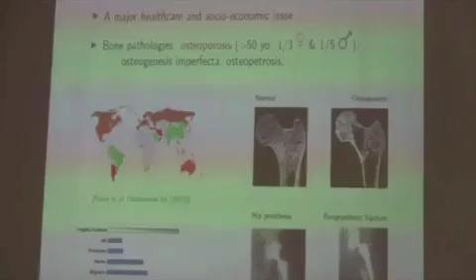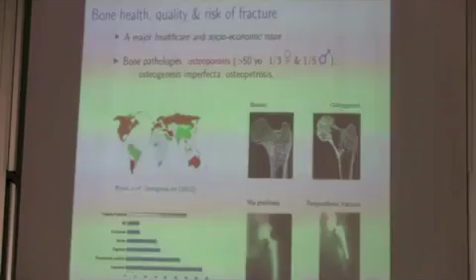It was said, everybody is concerned, and osteoporosis and bone diseases are a very important issue. It is estimated that fragility fractures related to bone diseases are the second most important social problem in healthcare after dementia. And we have already heard about the differences between a normal bone and osteoporotic bone, as well as the fact that osteoporosis, which is a kind of genetic disease, is not the only action which would justify this bone structure, since after a long bed rest, or even for astronauts coming from a microgravity environment for several months, their bones have similar structures to the ones of osteoporotic people.

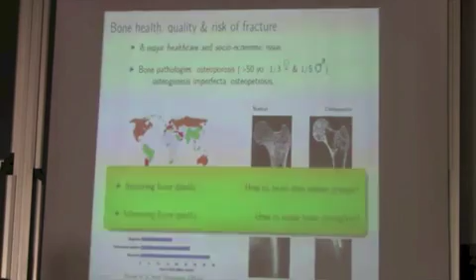Why? Because bone is able to optimize, to adapt itself to its prevailing mechanical, but I will be focused also on biochemical environment. So in my talk there are two main questions which are relevant in bone biomechanics, these two ways, which I try to depict in this picture. Bone remodeling is something which is important at the organ scale for physicians. They want to understand how to improve bone strength.

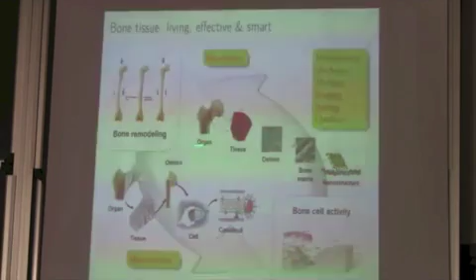But in order to do that, we want to contribute to understand how biomechanical stimuli can be transferred from the organ to the cell scale, where the bone cells, which are the real actors of bone remodeling, can be activated, can act in order to remodel the nanostructure, the microstructure of bone up to the organ scale, where we can observe such a beautiful and very well organized

structure. So these two terms, mechanomics and materiomics, are two very new terms. This was introduced in 2006 in the World Congress of Biomechanics, and this is even younger. And they refer to these two ways, which are of course concerned with each other. But for today, I will be only speaking about the very last part. So bone remodeling at organ scale.

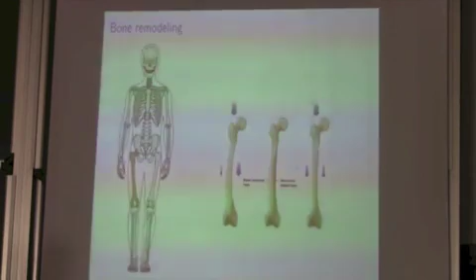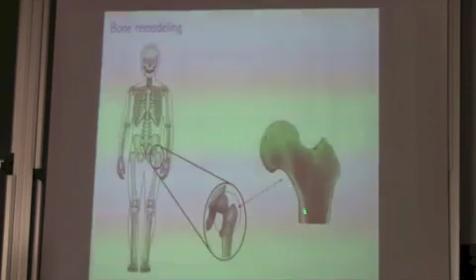At that scale, remodeling can be perceived as a change of shape, but not only that. Actually, if you look inside the organs, we can see that there are several kinds of microstructures. There is a kind of dense outer shell, what is called cortical bone, with a spongy material inside, which is the trabecular bone. And these structures are not always the same according to the anatomic site. For instance, in the sternum or in the femoral head, the microstructure of the trabecular tissue is different.

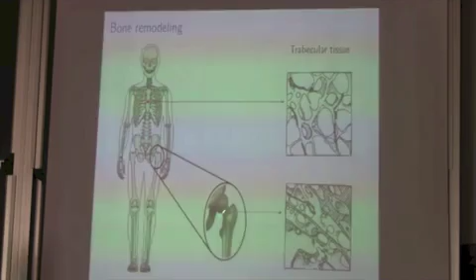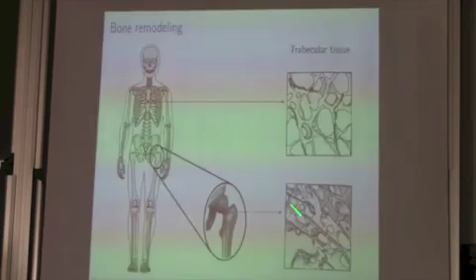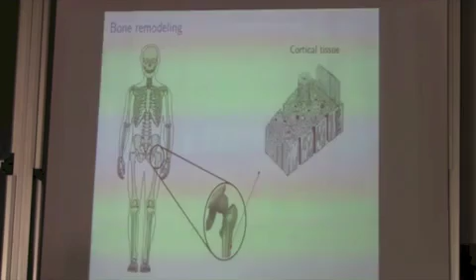So why? Because the mechanical forces that these two bones are supposed to support are not the same. So in there we need less bone matter than in here. Moreover, you can see that in the sternum there is no specific pattern, whereas here there are specific directions, so isotropy versus anisotropy. This is very interesting. Also, the cortical tissue has a very specific microstructure. There are some cylindrical units called osteons, which also have a major role in supporting the mechanical forces applied

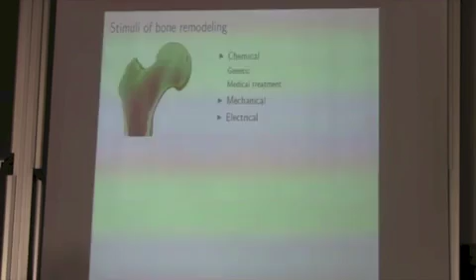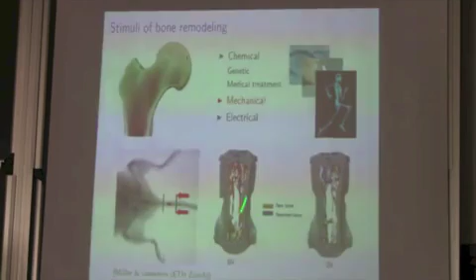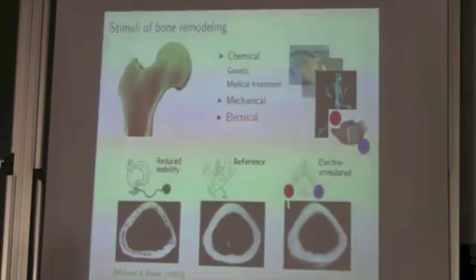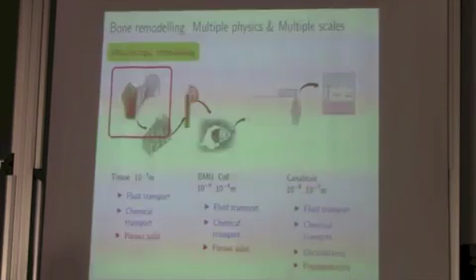That criteria have to account not only for mechanics but also for chemistry, since genetic and medical treatment can affect bone structure. Mechanics, of course. This is a picture of a rat tail when it was subjected to a mechanical force or not, and also electrical stimuli. We know now that electrostimulated bone can increase the bone mass, when this was a turkey, not a human. So the nature of the stimuli driving bone remodeling is manifold. And what we try to do is to develop a model and to understand the nature of the very basic mechanism driving bone remodeling, accounting for all these types of phenomena.

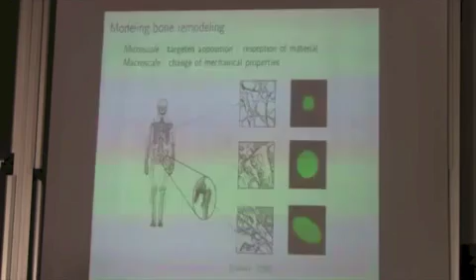So, looking explicitly at the macroscopic scale, I will try to explain how we could explain the different bone microstructures that we can observe. In this case, look at these green spots, since they will play more or less the central role in my talk. The green spots hint at the elastic ellipsoid. So, more or less, this is a small green spot.

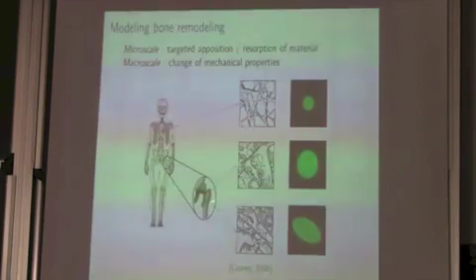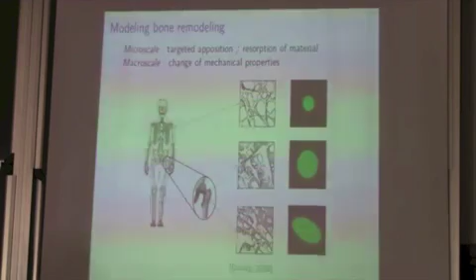That means little bone matter with an isotropic structure. In here we will have more bone matter. In there we will have more bone matter and anisotropy. So my talk will deal only with something like that: how to move from one picture to the other one. And since this is still maybe too difficult, I will focus only on the latter case, which I will be speaking about in a few minutes.

Just to give you the framework, this morning Professor Del Piero has spoken about the framework that I will use to develop my work. This was the counterpart of what we've been talking about, and I'm looking forward to tomorrow's introductory lecture, which will also focus on generalized continua for biomechanics. So, in my case, I will move from the framework of Germain and Capriz. I will try to develop the kinematical, balance, and constitutive structure of the theory.

So, what about kinematics and what about remodeling in this framework? Besides the displacement, remodeling will be described as the evolution of the microstructure. And as I told you, I will make a very simplifying hypothesis, not any kind of evolution, just rotary remodeling. That means that the bone matter is always the same, and what I'm looking at is just the rotation of the elasticity axis. Of course, it makes sense if the material is not isotropic. So there is anisotropy, basically. Okay, this is the kinematics.

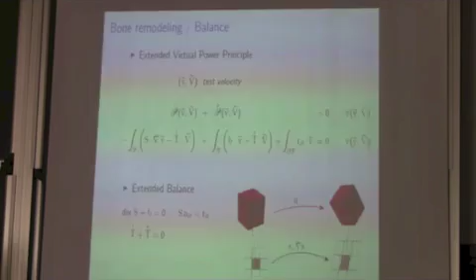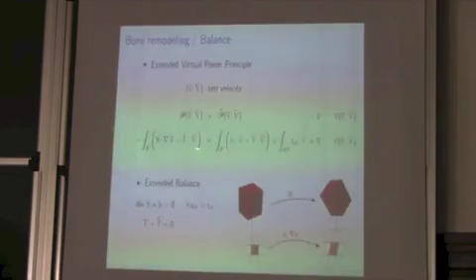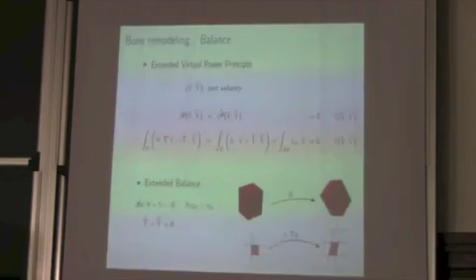What about balance? I will use the extended virtual power principle to develop the balance structure of the theory. In red, I try to put whatever is related to remodeling, just to keep things clear. In black, whatever is classical. So besides the classical Cauchy stress, or Piola stress in this case, there are additional actions, outer and inner actions, related to remodeling. What are these actions? These actions are the mechanical feedback of whatever mechanical but also biochemical stimuli triggering bone remodeling.

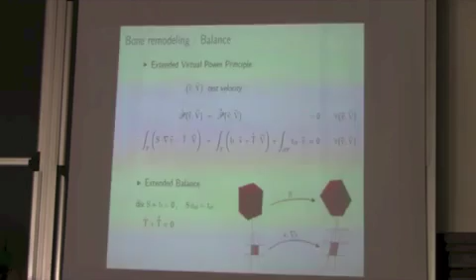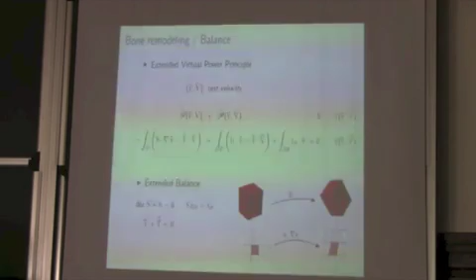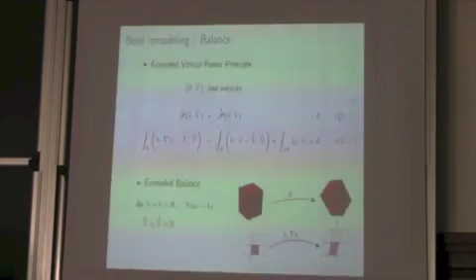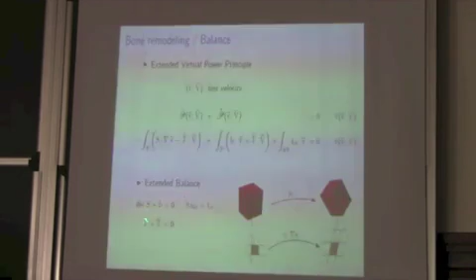The big challenge is modeling these actions. What is the effect of the biochemical environment on the remodeling? In which way is power expended? Somehow the virtual power principle is my gauge. If there is bone remodeling, there is some power expended. Eventually I get the balance equations, the standard balance equations in black, and the remodeling related balance equations in red. This is a zero order balance equation, so there are no boundary conditions in this case, since this equation is just saying that the outer remodeling stimuli have to be balanced with the inner bone remodeling stimuli.

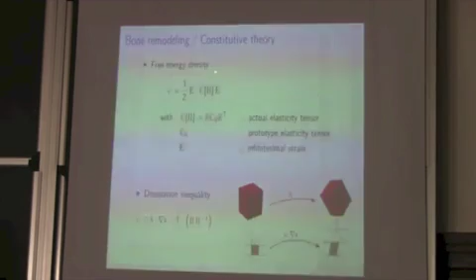Let's go further to the constitutive theory. This is the critical point. To make things easier, I introduce a free energy density, which is a quadratic measure of the small strain, but the elasticity tensor is not constant in time. It can evolve. Since I'm talking about bone rotary remodeling, the only way the elasticity tensor can change is just rotating, with respect to the prototypal, the initial if you want, elasticity tensor, through an orthogonal tensor R.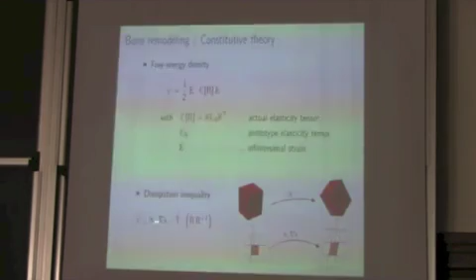I add a proper statement of the dissipation inequality, where there are the Piola stress and the remodeling actions, and requiring that this term is greater than the time rate of the free energy, with some calculation I can end up with the constitutive law for the stress and for the remodeling actions. In the remodeling actions appears this term, SE, which is twice, I forgot a 2, twice the skew part of the product SE, plus or minus, according to the definition, a dissipative contribution. This is a very important point, skew part of SE.

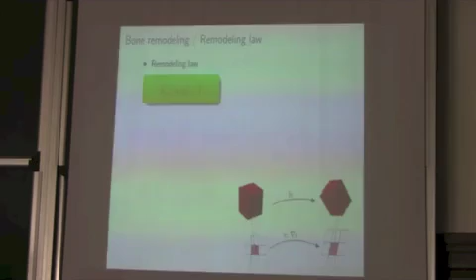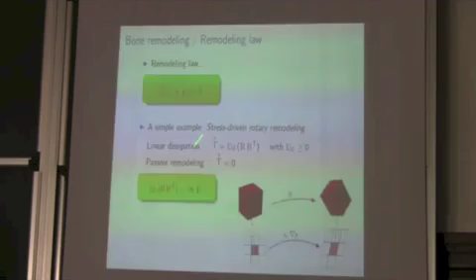Why is this? Okay, so let's put everything together, balance, constitutive theory, and let's look at the remodeling law. In this case, it looks this way. In here, the dissipation related to remodeling is equal to this term, twice the product SE, plus the other contribution that I can put on my system in order to trigger remodeling. Let's switch it off, since we are not able to model it properly, and look only at stress-driven rotary remodeling. Moreover, let's use just a linear dissipation.

The evolution equation that I will end up with for remodeling looks this way. So, as long as this term is not zero, there is remodeling. There will not be any remodeling anymore when this term is zero. But what does it mean? That means that S and E commute. So somehow there is a result which was unexpected and which was not plugged at all within the model, that the remodeling equilibrium is attained when the eigenspaces of the stress and of the strain tensor are parallel.

This is exactly what everybody says, Cowin and Frost and other people: remodeling equilibrium is attained when stress and strain are parallel. I didn't put this information anywhere in the model, and it appeared naturally. It was surprising.

So, just to fix some ideas, I will show you some results in 2D, where the rotation is parameterized by a scalar. In this case, I will use data for orthotropic elasticity, and what I will look at is the evolution of this material element when applying a 1D traction in one direction. So it is possible to obtain an explicit form for the evolution law, which becomes a scalar equation in this case.

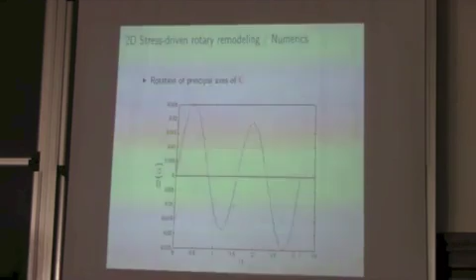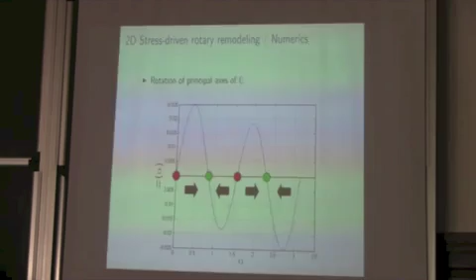And here is the result. So this term omega is the right-hand side of that equation. This is the remodeling stimulus. It is possible to see that the zeros of this plot correspond to the remodeling equilibrium points. It is a π periodic function, so in 0 π there are 4 points for that set of data, and some of them are stable, some are not. Green spots are stable, red spots are unstable points.

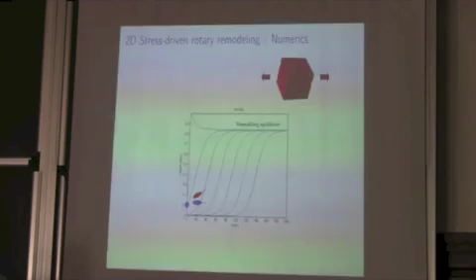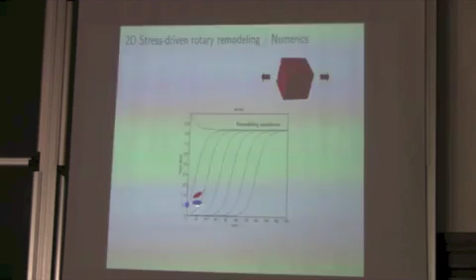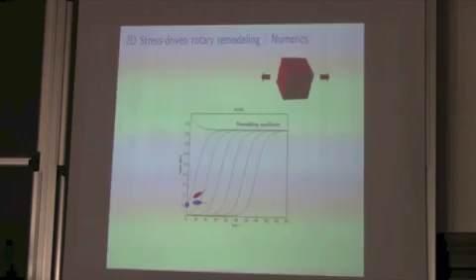That means that if we look now at the time evolution of what's going on at that material element, the blue ellipse represents the stress direction, the stress ellipsoid, which is constant, 1D traction. And the red one represents the strain ellipsoid, which evolves in time according to the evolution of the elastic tensor. In here, the stress is constant.

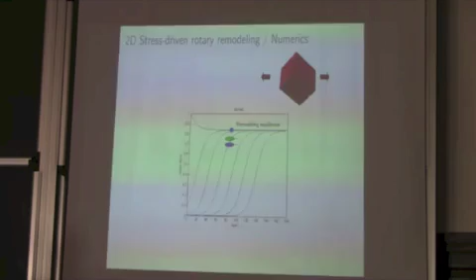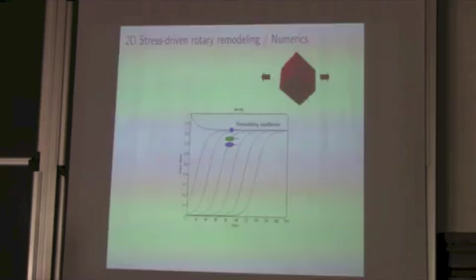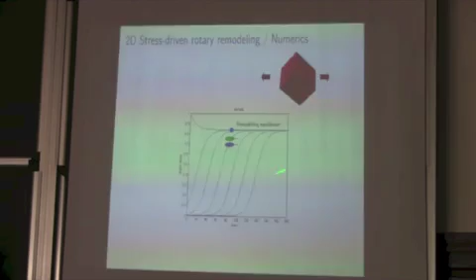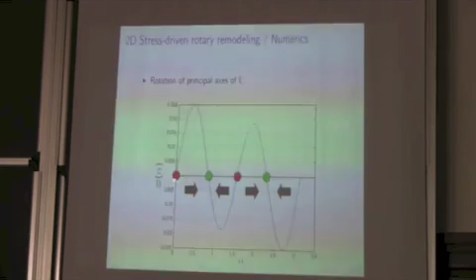So what is going on in time is that the strain aligns with stress, whatever the initial condition we start from. So somehow the remodeling equilibrium is a very stable final state for that model. The problem is that even when moving very close from zero, so the elasticity axis alpha are almost aligned with the stress direction, since the 0 point is unstable, the system moves apart from that, which is somehow strange.

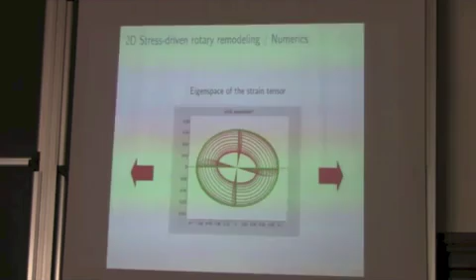Okay, I will try to explain that first. There was a movie. Okay.

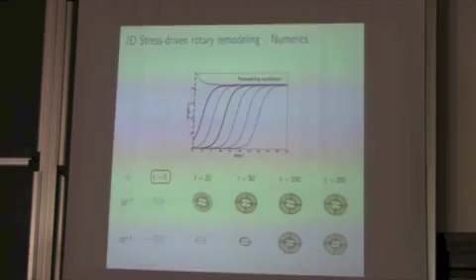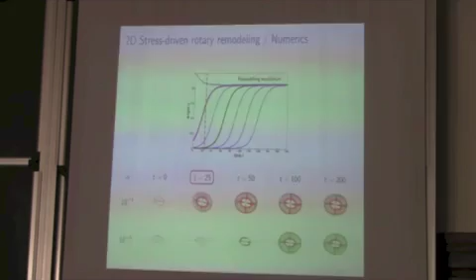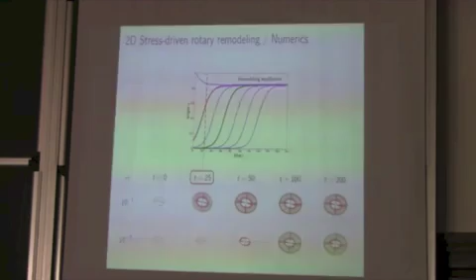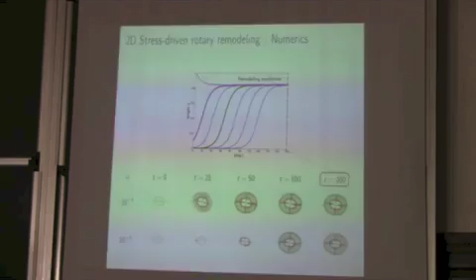So, since I thought that the movie wouldn't work, you can see here the eigenspace of the strain tensor evolving in time. The strain directions are the axis of the ellipse, and the length of the axis are the eigenvalues. So you can see that the eigenspace of the strain tensor evolves in time and eventually aligns with the horizontal direction, which is the direction of the applied forces.

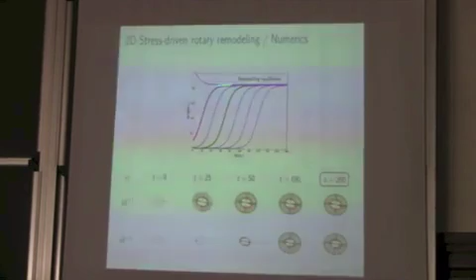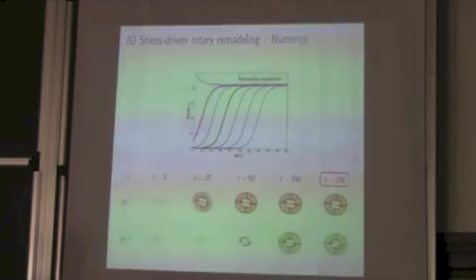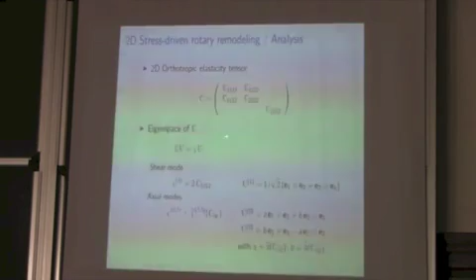First of all, it is possible to obtain an explicit formula for all of that, and what I've done is to project all the quantities, strain and stress, on the eigenspace of the elasticity tensor, which changes in time. Since the elasticity axis changes, the eigenspace of the elasticity tensor changes as well. Well, it is possible to see that this term, which is the remodeling stimulus, admits, for the case I'm studying, 4 points. It is 0 in 2 cases.

Either when sigma 1, the projection of the stress tensor on the first eigenspace, this is the first eigenvector of the elasticity tensor, so this is shear and this is axial. So either no shear or a strange relation between the other projections. When we look at this second case, actually we end up with this formula, and in this case the first condition, no shear, is always a remodeling equilibrium point. The second condition admits real solutions only in some special cases.

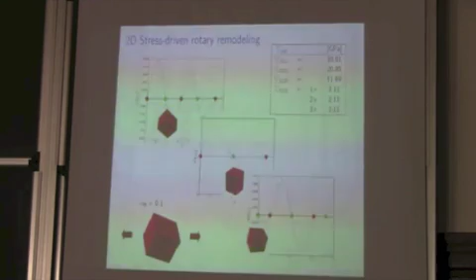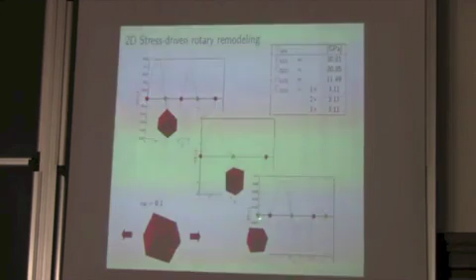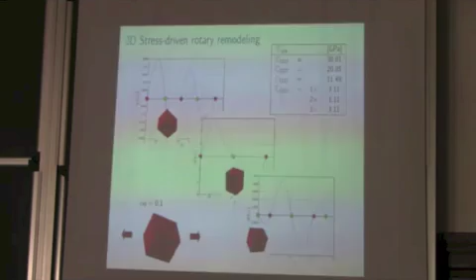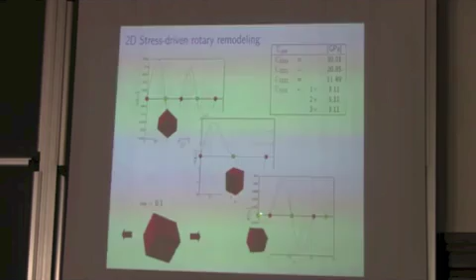It turns out that actually there may be 2 or 4 solutions, and the stability of those points depends on the elastic coefficients that I put in the elastic tensor. That means that the 0 point might be unstable or stable according to the specific value of the elastic coefficients. These 3 plots correspond to 3 different values of this term of the elasticity tensor. So when this shear related term increases, 0 becomes a stable point. When it is small, 0 is not.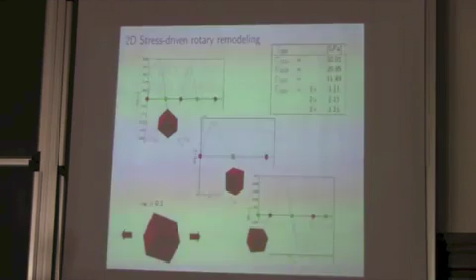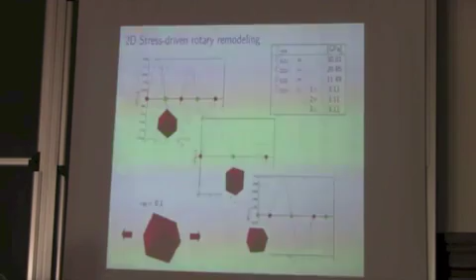So there is an interplay between the actual elastic coefficients, which justifies the final equilibrium state of the material. I think I'm in time, so I just spend a few words to answer the initial question. Remodeling, is it a constitutive matter? Partially. Since it seems that there is something more, something which is related to balance, which comes before the constitutive theory.

The existence of a remodeling equilibrium state comes before the introduction of any specific constitutive assumption, but very basic ones. But of course the way we get to that specific equilibrium point, this one or another one, is a constitutive matter. So the specific constitutive prescription can drive the system to one or another equilibrium point.

And on top of that, in this case, I switched off whatever related to biochemistry. The outer stimulus to remodeling is set to 0. So, should it be there, the scenario would be even more complex, and it would be the interplay between mechanics, this condition which is related only to mechanics, and biochemistry, which would lead the system to a specific equilibrium point which may even not exist anymore in that case.

Last question. If your elasticity tensor depends on some rotations, why do you not modify your strain tensor in the same way? The strain changes according to the elasticity tensor. The strain tensor changes since the strain is computed as C inverse sigma. Sigma is constant, and E, the strain tensor, is modified. Modify the strain tensor? Yes.